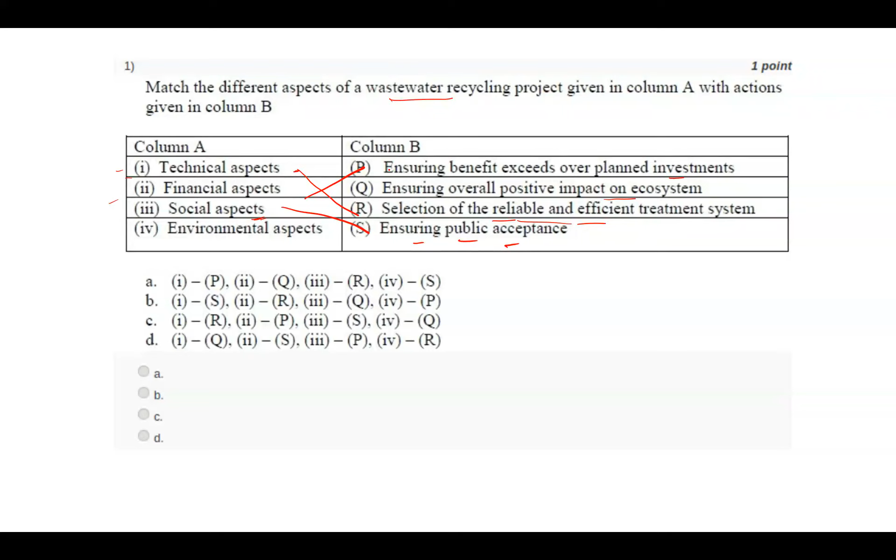What about social aspects? Social aspects means ensuring public acceptance. In our country, if you take water from a well or from a desalination plant, people accept it and don't have any problem drinking it. But when you think about wastewater - treated water from the wastewater industry - many people think it's not to be consumed. So there should be public acceptance if you want to succeed in the wastewater recycling sector.

Environmental aspects means ensuring overall positive impact on the ecosystem. When you treat wastewater, you're not disposing it directly to the land or water, so the ecosystem is preserved - you extract maximum minerals, decrease the amount of chemicals inside, and then dispose it. So there is ecosystem balance that can happen with wastewater recycling. So the correct answer for this is C.

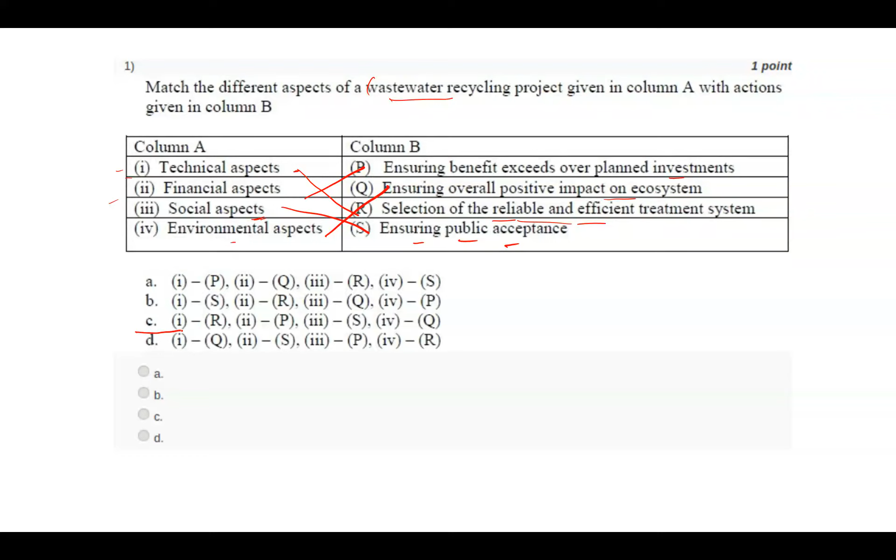Next question: the major hurdle in wastewater recycling is - options are: A) unavailability of suitable technologies, B) political motivations and social acceptability, C) abundance of freshwater resources, D) none of the above. Any answer?

No, it's not option D, it's B. Political motivations and social acceptability, because when we compare other options, you see there are...

If you have good policies in India, it was easy to achieve this wastewater recycling, and also social acceptability. More than 50 percentage of people in India think that this wastewater treated water, the water generated after treatment of waste, is not fit to be consumed. So they have some religious thing, or they just don't accept it. So that is the important thing.

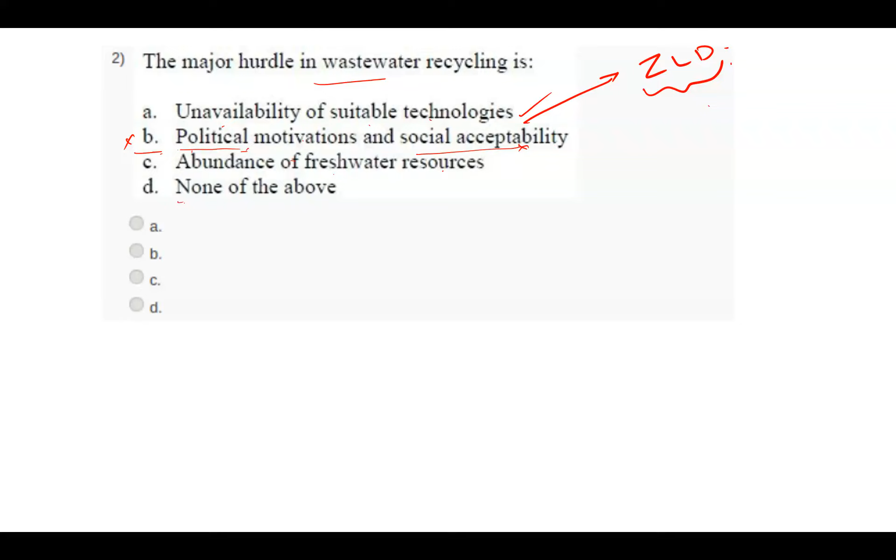Also the political aspect, we should have strong policy, strong laws. We lack these things. We have very good technologies, well established technologies, and also developing technologies to treat wastewater, and the zero liquid discharge is there. Even zero liquid discharge has started in some parts of India. But people are not ready to consume the water from wastewater treated plants.

Next question, the fit for purpose water treatment. This term fit for purpose wastewater treatment is a process that considers the intended use of water, the environment, the economy, to treat the wastewater. The goal is to treat wastewater to the right quality without over or under treating. What do you think over treating means?

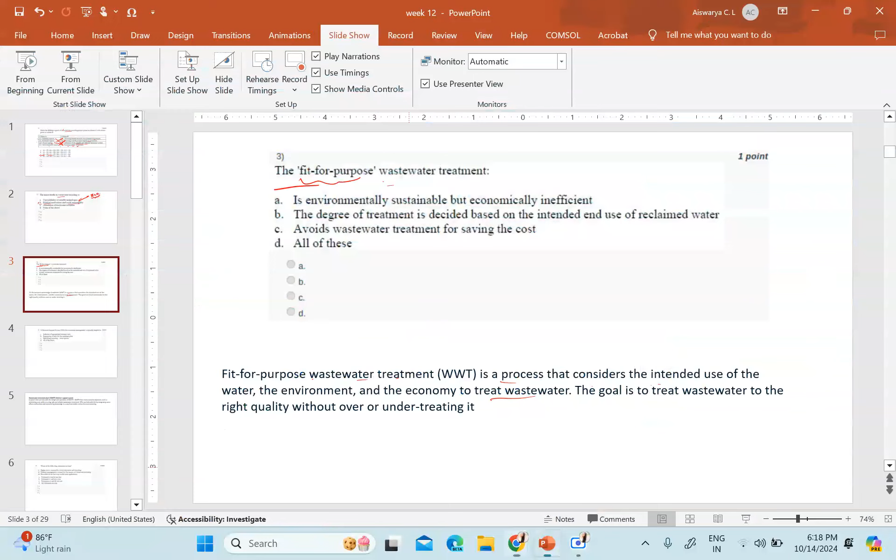Anyone say over treating? What do you mean by over treating water? Over treating means the water is extremely pure, it's deionized water. The conductivity of deionized water is very low, we can approximate it near to zero. That means the elements are not present. Even for human consumption, there should be proper elements in the water so that it benefits our body. So DI water means it's completely pure, there are no other mineral elements present.

This is the DI water. That means if you over treat the water, if you treat it to completely remove all the minerals, all the elements, then it will reach near to DI water. What we need is our water consumable. If this consumable level is here, and if you treat again then it becomes DI, then if you treat less then it is under treated.

So we can't consume the water here. When we reach our treatment technology or treatment system to treat our water to a particular level for consumption, that is consumable. And again if you treat the water again, then it becomes completely highly pure water, where there are a lot of elements not present which are needed for our body. So that is the over treated water.

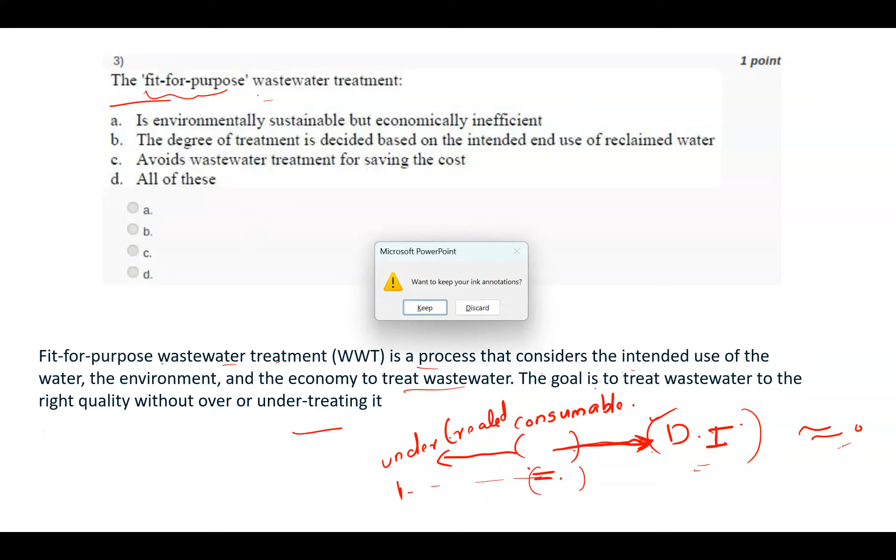Any answer? B. Yes, B is the right answer. So why is this like, you should know the end use of water, then you decide how much treatment you need.

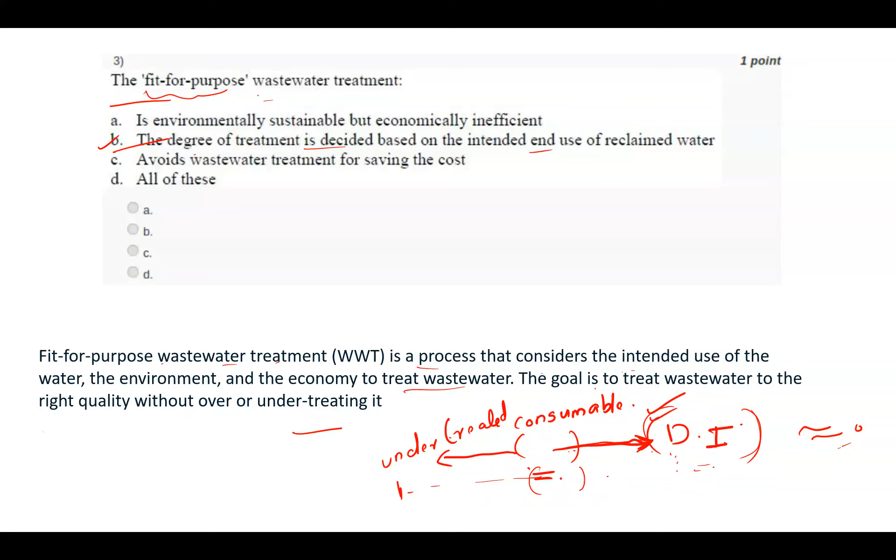So for what is DI water useful? In industries, for fabrication. For example, if you want to fabricate membranes even for dialysis, very sophisticated membranes, in some of the steps you have to use DI water, not RO water. So during the fabrication pathway, there are different applications where you need DI water, so there you need to treat that much. If you want to consume, you don't need to treat that much like DI, then it is fine. Undertreated means if it's a little bit undertreated, then it's not human consumable, but you can use it for agriculture. So you decide the end use where you want to apply, then you decide how much treatment I should give for the wastewater.

Next is fourth question. A decision support system, DSS, for wastewater management is typically helpful in: A, selection of appropriate treatment units; B, sequencing of units for treatment plant; C, identifying recycling or reuse options; D, all of the above. A decision support system for wastewater management, what do you think?

Any option? So the answer is D, all the above. See, decision support system for wastewater management - you should select the appropriate treatment units and the sequencing of units for the treatment plant.

So, how many units do you need? For example, say you need to treat wastewater from dye industries, and then wastewater from oil and gas industry. You will select the technology - you go for a technology and select which one is most suitable for oil and gas, and which technology you can go for the dye industry. That depends on the chemical composition of the wastewater also.

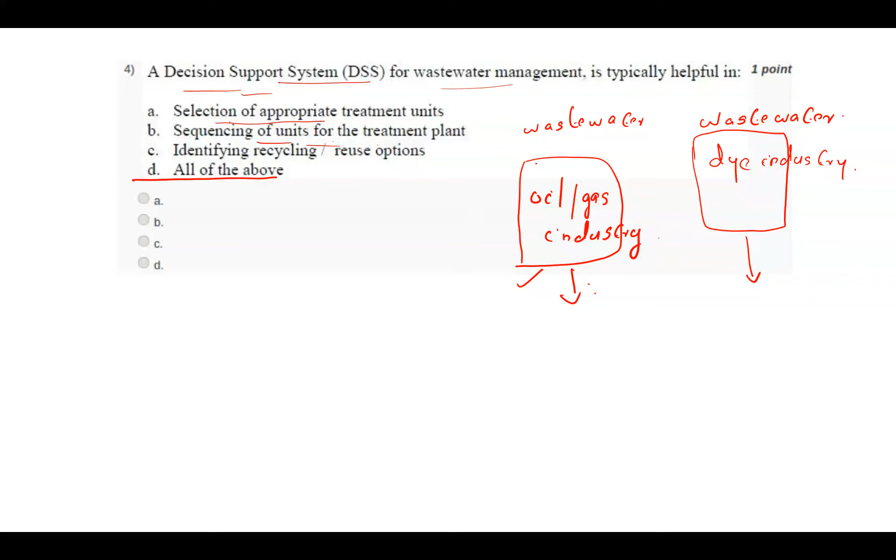Then you have to consider how much you need to treat. If you go for a thermal treatment method, you may have heard of MSF and MED - multi-stage flash distillation, multi-effect distillation. These are thermal based technologies, going chamber by chamber. If we put the wastewater in, some vapor is generated and collected, then the remaining wastewater goes to the second chamber, like that. So you should know how big you want it, or how many different compartments you need for this MED and MSF - this type of chambers are there.

Or if you go for electrodialysis - we have already discussed this. Ion exchange membranes are there, anion exchange membrane, then cation exchange membrane, and this becomes one compartment. Like that you can stack more. So the number of these will depend on the concentration, and also the amount of water you have to treat.

Then identifying recycling or reuse options. Before that, if you don't want to treat, you can still recycle. Also, the water which is treated from any of these technologies - even MSF and MED - the vapor is somewhat pure, and the wastewater you get at the end stage, even the concentrated one, you can use. If it's more concentrated, then it is more rich in minerals or some elements, so that one you can use for resource recovery also.

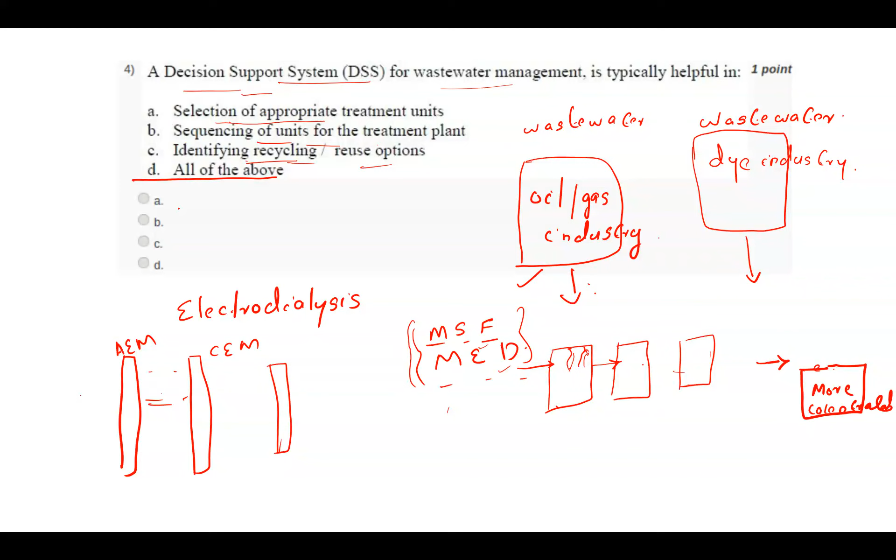So a decision support system for wastewater management will include all these steps. So here you can read - this wastewater treatment plant decision support system helps with the design and operation of wastewater plants, facing many complex objectives such as minimizing cost while ensuring safe and reliable wastewater treatment. It can help by integrating cause-effect relationships and representing knowledge in a way that enables comprehensive reasoning.

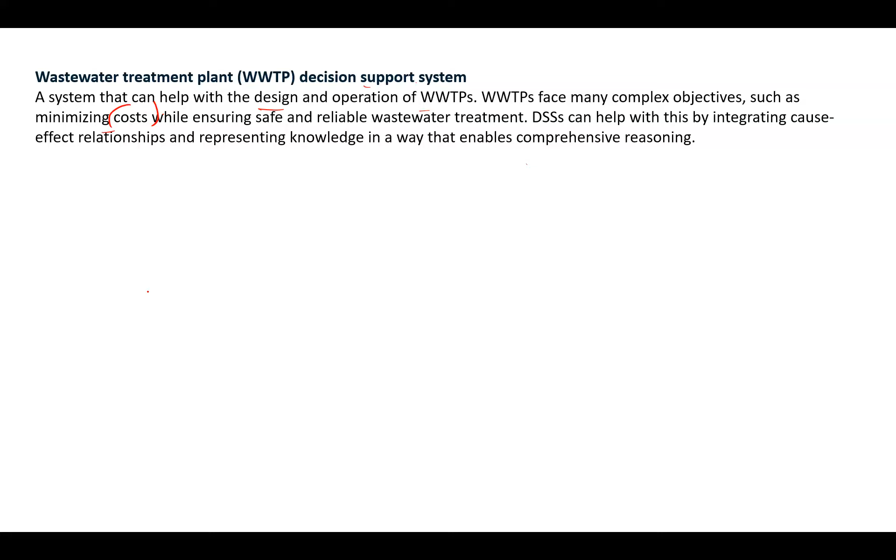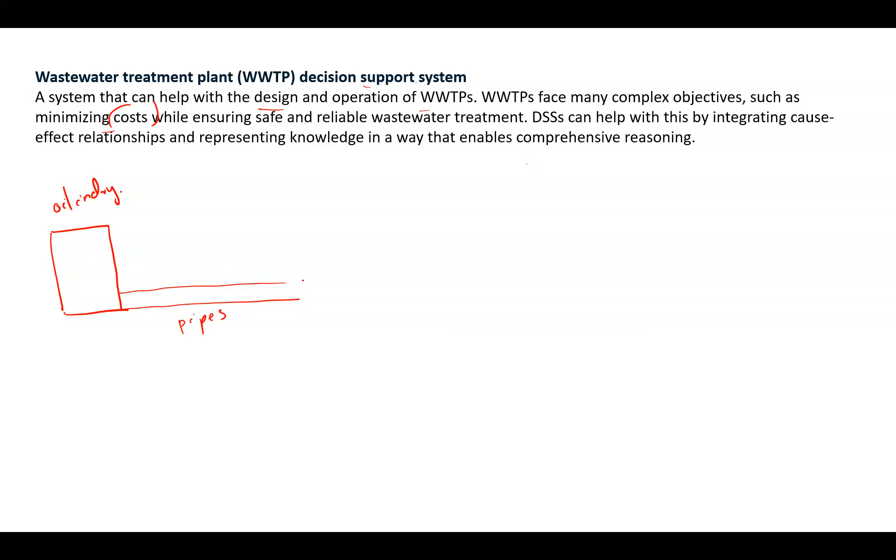So here one more thing is there - cost, how this affects cost, minimizing cost. For example, if you have an oil industry here, and you want to treat it away from your plant, then you need to transport it. For that you use transportation pipes and pipe systems. Then you have a plant - so when you calculate the cost, here it will come, this is the treatment plant.

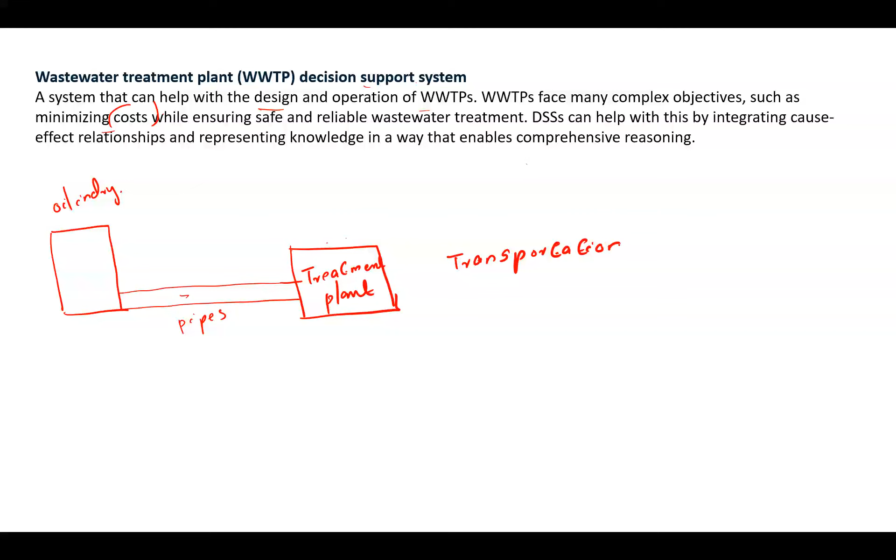When you analyze this cost, you have to give also the transportation cost. Transportation cost is also a big thing in many treatment plants. You may have also heard of brackish water treatment plants - mostly in Rajasthan, which is a landlocked region. So there, transportation cost, when you get a concentrated one, how can you dispose it - there is no sea nearby, so it is much more difficult. So transportation cost is an important thing. Then you should have the planned build, like a whole plant setup. Then also labor cost will be there, and maintenance cost you can add.

Then also you need electricity. I'm not adding electricity cost here, but even in maintenance, or maybe in the plant setup, you can add electricity also. Electricity is an important thing. So you have to understand how much cost is needed for a plant setup, and in what step you can minimize or optimize the cost so that the total cost is less.

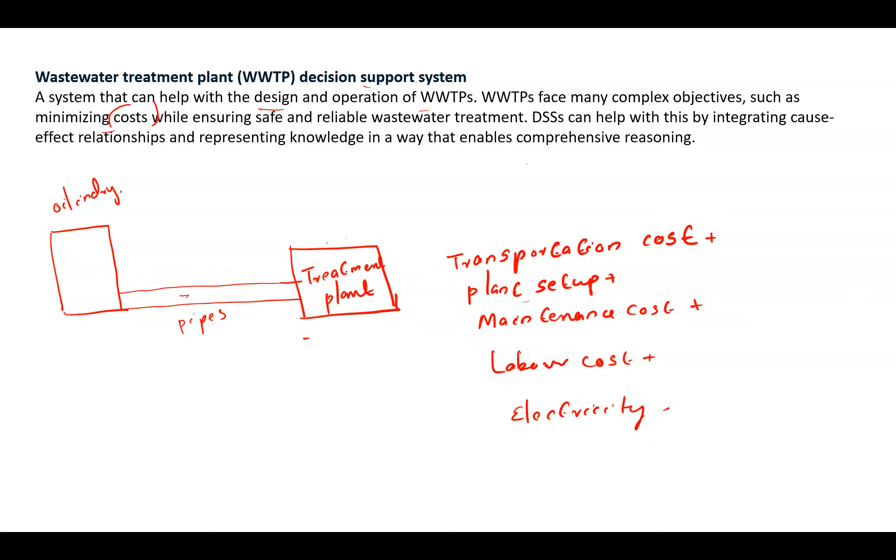You may have heard of one more thing. If you set up a plant in one place, that particular place may have another setup, like it may be full of plants, trees, or other buildings. You have to first remove all these and then build. So clearing the land is also a big thing. Finding a land and clearing the land is also a big cost. All these costs will come when you fully analyze the water treatment plant setup.

Next question: which of the following statements are true? 1. Higher cost is incurred in wastewater reuse and recycling. 2. Nutrient management is crucial for the success of wastewater recycling. 3. Biosolids do not have any useful reuse applications. So which of these statements are true?

Any guess? Any idea?

Answer is A. Statement 1 and 2 are true. Higher cost is incurred in wastewater reuse and recycling. Then nutrient management is crucial for success of wastewater recycling.

Okay, next question. Public acceptance for recycled water can be enhanced by. Four options are given: A. Public awareness campaigns involving media and women. B. Providing subsidies on using recycling water. C. Promoting through demonstrative projects and models. D. All of the above.

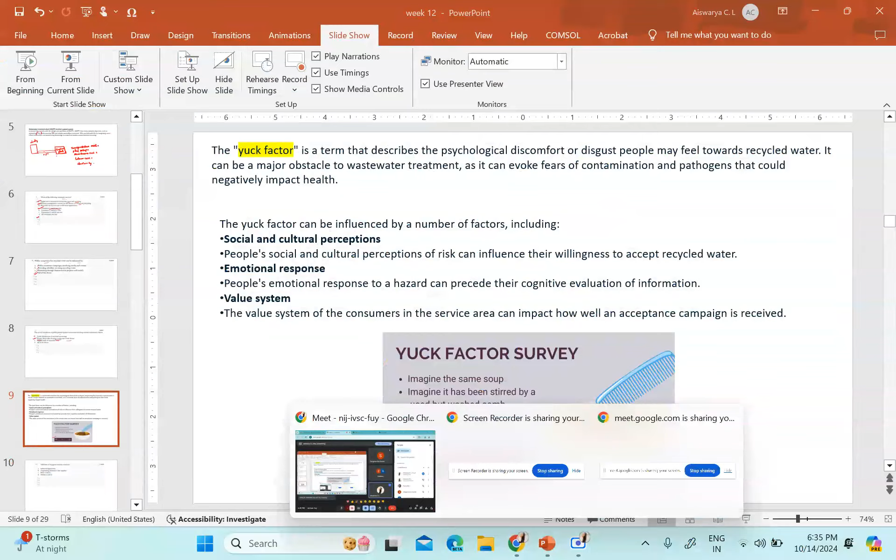Then you can even tell. So you guys, I think how many people are there? I think today 4 people are there. So can you just message here in this message box, from this yuck factor survey. From 1 to 10, which number do you choose?

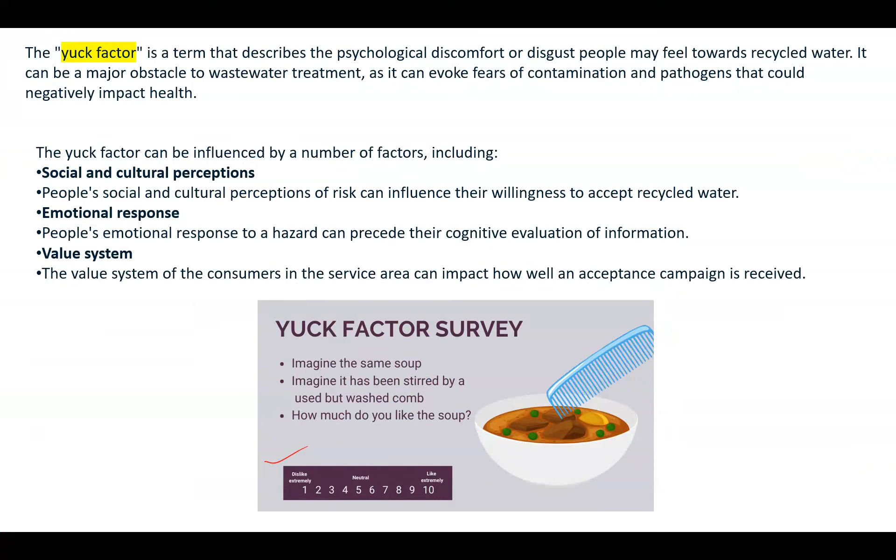Imagine this is a nicely prepared soup, and it is stirred by a washed comb. It is a cleaned comb, washed comb, but still you're stirring with the comb. What do you think? Do you like the soup? According to your likes, can you just message in this box which number you choose? You can just put a number.

Okay, Sanjay says 1.

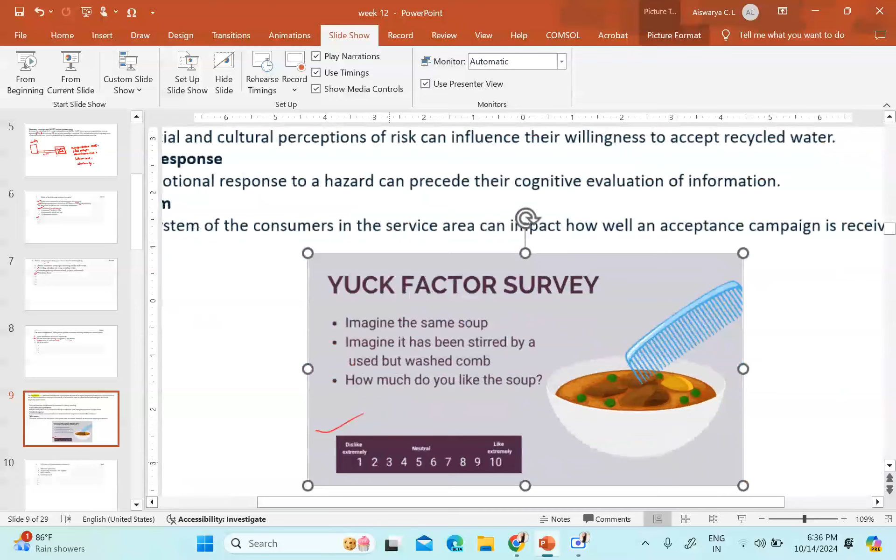Yes, the lowest one is 1, you can see here. Lowest is 1 means you extremely dislike. Then when you reach 5, it's neutral. Then 10 means you are fine, you're okay.

Sangamitra says 1, then Pooja says 9. Okay. Yeah, many people, even when we see this now, we don't like it.

Okay, so any comments you want to say? Sangamitra, you want to add something? Okay, then Pooja, you can add something.

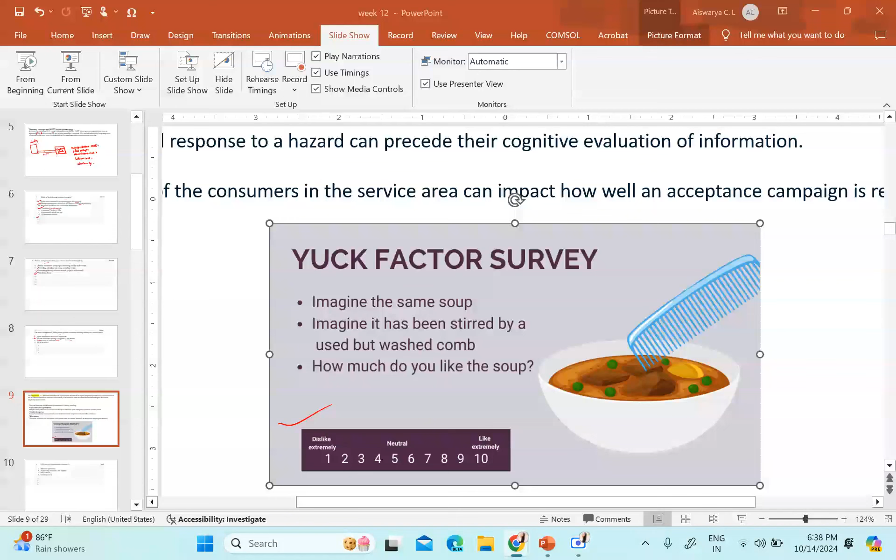Okay, so you guys also know how recycling of water is happening in space. Even the urine is recycled and taken for drinking, because there is no other way of getting water. So I'll just type space recycling.

You can see if you search online, you'll get a lot of documentaries on this, how they are not wasting even a single amount of water, because there is no other way of drinking. But even when we get enough water to drink from nearby, we don't feel good to drink recycled water, just like if your food is in touch with something unpleasant, we don't feel like eating it.

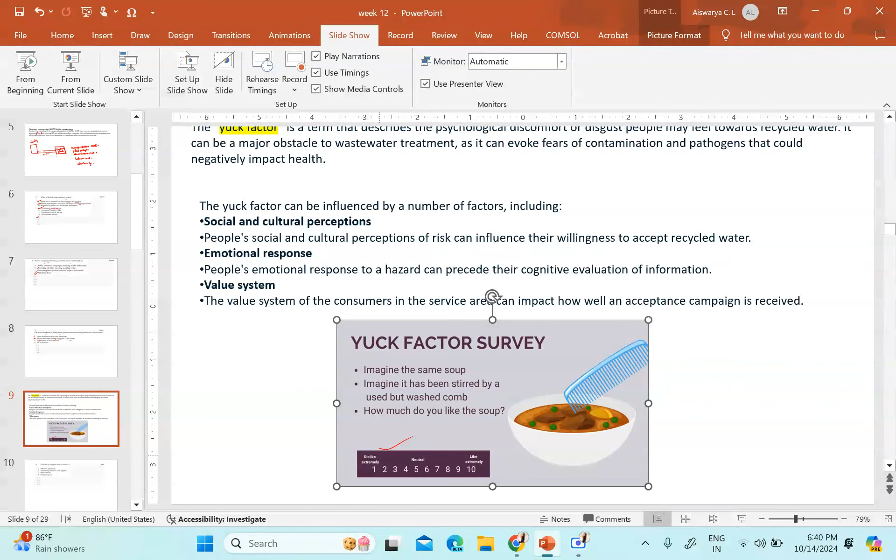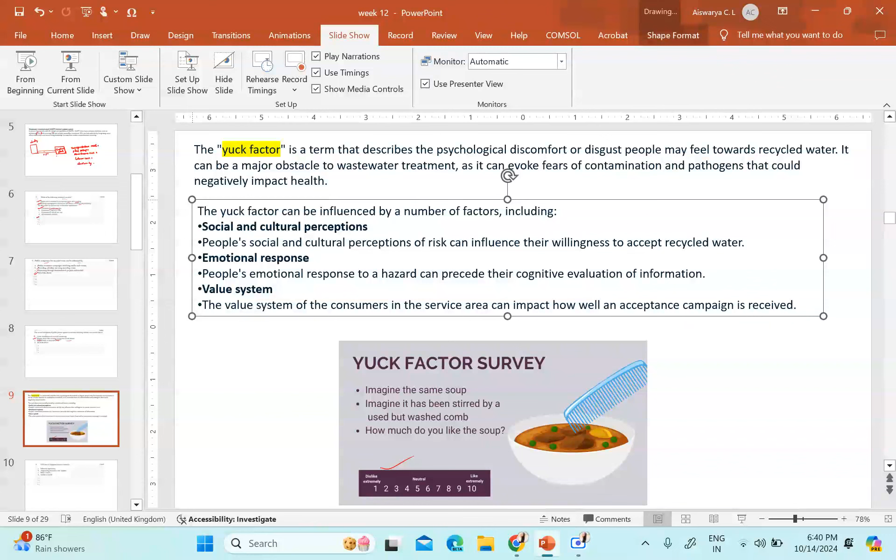That is true, but in some situations, because of climate change, there are areas with drought and areas with heavy rain. So at a particular time we also need to adapt, and we will start drinking even treated wastewater, because we won't have any other source at that time. You can google it or go through documentaries to know more.

Now next question. NEWater of Singapore recycles water for what purpose? Four options are given: industry, augmenting domestic water supplies, both A and B, or neither A nor B. What do you think?

NEWater of Singapore. Answer is C, both A and B. Industrial application, also augmenting domestic water supply, depending on the end composition of the NEWater, it can go either to industry or for domestic water supplies.

This NEWater is a very famous name nowadays, because when you go to water conferences, there are talks on NEWater most of the time. This NEWater is a brand name given to highly treated, reclaimed wastewater produced by Singapore's Public Utilities Board. You may have heard of this.

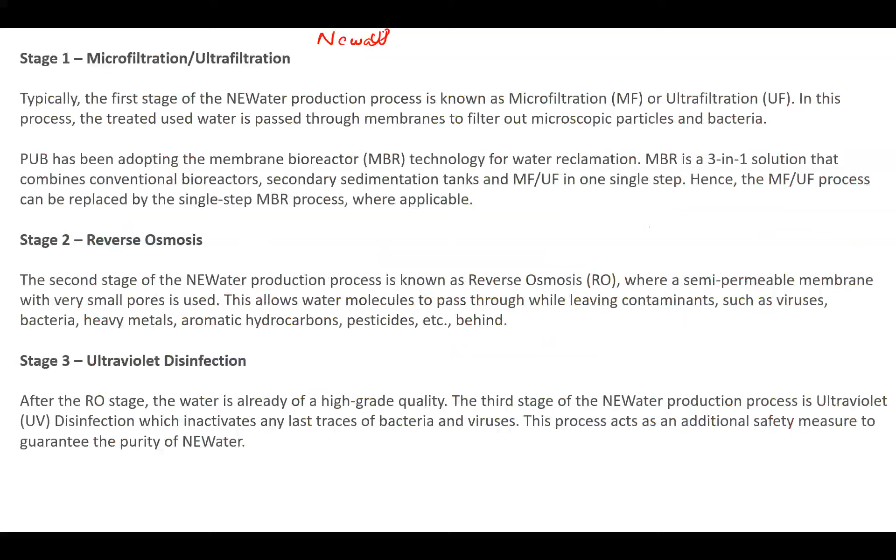Now how are they producing this NEWater, meaning how are they extracting this highly treated water? The first step in NEWater production is microfiltration or ultrafiltration, in which the treated wastewater is passed through a membrane to filter out microscopic particles and bacteria. That is the first process.

Then the second process is reverse osmosis, the second stage of NEWater production. Here a semi-permeable membrane with very small pores is used, which allows water molecules to pass through while leaving behind contaminants such as viruses, bacteria, heavy metals, aromatic hydrocarbons, pesticides, etc.

Then the third step is ultraviolet disinfection. After the RO stage, the water is already good quality. In the last stage, ultraviolet disinfection inactivates the last traces of bacteria and viruses, producing highly pure water. So why do we put reverse osmosis after microfiltration or ultrafiltration?

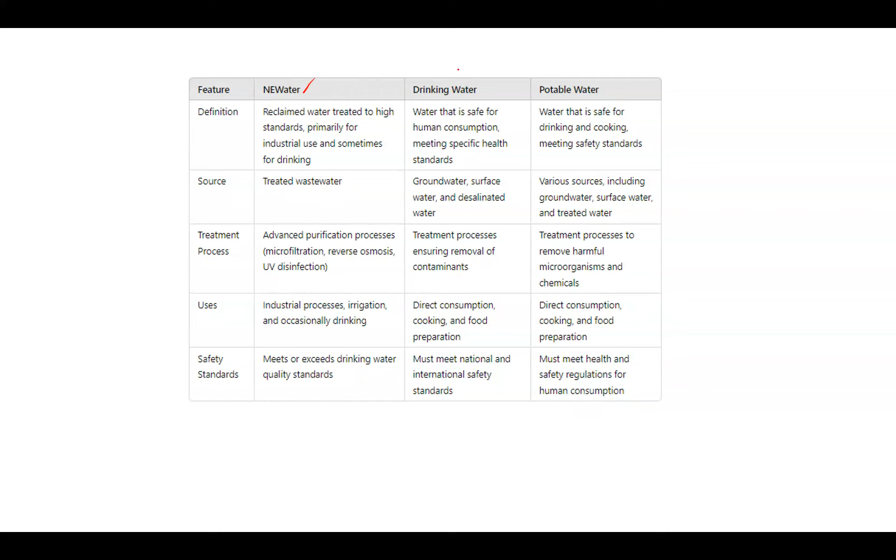Next question: Israel recycles most of its sewage for what? Four options are given: A, groundwater recharge; B, augmenting domestic water supplies; C, agricultural reuse; and D, industrial cooling towers. Israel recycles most of its sewage for...

Any idea? The answer is C, agricultural reuse.

Actually, Israel is a very small country, and they are developing very high tech technologies in water treatment because their area is very dry, semi or fully dried area. That means they need some technologies to produce water. They have a large number of desalination plants also, and for agriculture usage, they are recycling sewage waste.

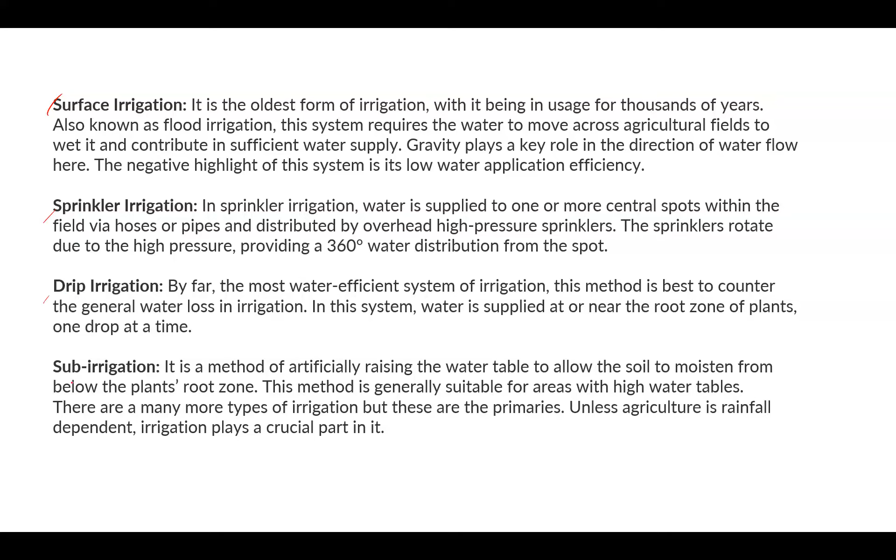So they more efficiently cultivate these types of drip agriculture lands, using this treated wastewater that you can see. I've given the irrigation types they have adapted: surface irrigation, sprinkler irrigation, drip irrigation, and sub irrigation. So you can just read that.

Next one: usually the public acceptance of recycled treated sewage is highest for, A, potable uses; B, bathing and washing clothes; C, fish farming and food crop irrigation; D, watering lawns and washing cars.

Most public acceptance, any idea? Yes, D, watering lawns and car washing. For this, most people don't have much objection. Potable uses, people were not that much okay with that. And also bathing and washing clothes, and fish farming and food crop irrigation, because many people think that when we apply waste treated water near the food crop, then when we consume the food from the crop, that will affect us.

Okay, next question. Advanced treatment techniques used to treat wastewater for direct or indirect potable uses in NEWater Singapore, and Orange County Water District California include: A, membrane bioreactors and advanced oxidation processes; B, activated carbon adsorption and chlorination; C, microfiltration, reverse osmosis, and UV disinfection; D, membrane bioreactors, ozonation, and UV disinfection.

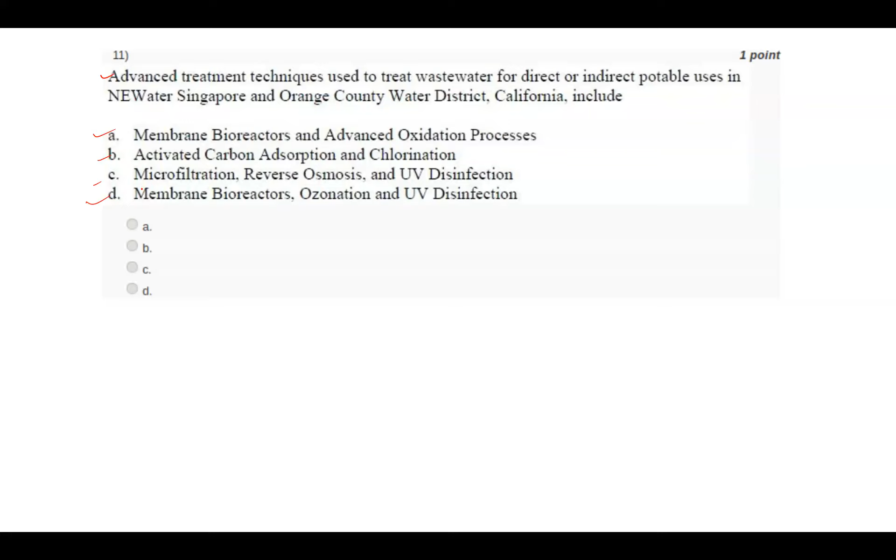Okay, the answer is C only. C is the answer: microfiltration, reverse osmosis, and UV disinfection.

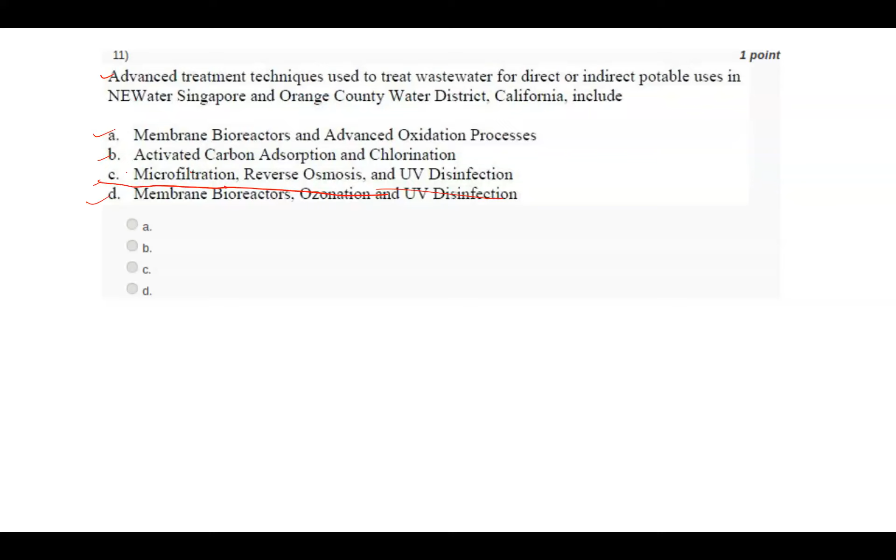Next question. Zero liquid discharge policy as a mandate for gross polluting industries asks for: A, ensuring treatment and complete recycling of industrial effluents; B, only land disposal of wastewater and no discharge to surface water bodies; C, shift to production of products which do not require water; D, all of the above.

So ZLD for the polluting industries, it's mandatory. Why is it? Which option is more suitable? Yes, right, it's A: ensuring treatment and complete recycling of industrial effluents.

Zero liquid discharge (ZLD) is mandated for gross polluting industries to ensure treatment and complete recycling of industrial effluents. Option B, land disposal of wastewater with no discharge to surface water bodies, is wrong because land disposal still pollutes groundwater, and during rainy season that water can reach nearby water bodies too. The option about shifting to production of products that don't require water is also not right. So the correct answer is ensuring treatment and complete recycling of industrial effluents, needed for polluting industries.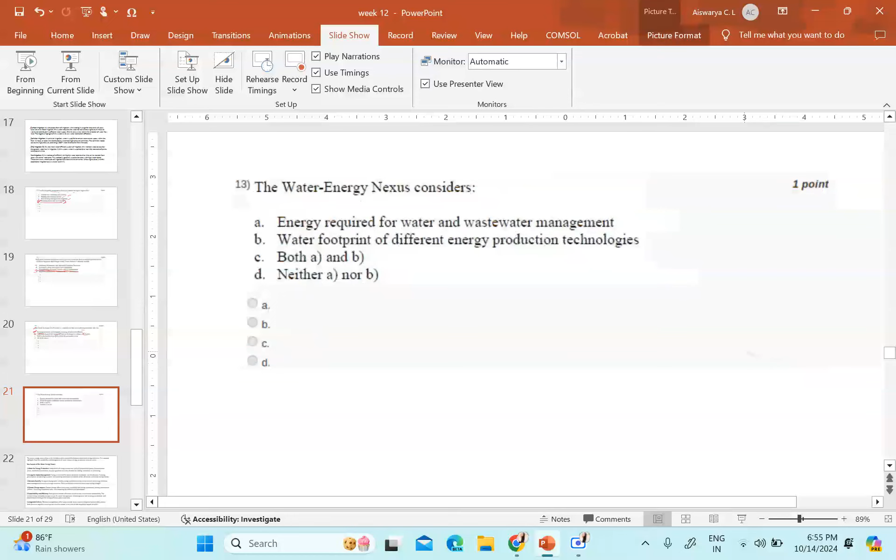Next question: the water energy nexus considers which of these options? A, energy required for water and wastewater management. B, water footprint of different energy production technologies. C, both A and B. D, neither A nor B.

What do you think? Any answer?

The answer is C. Energy required for water and wastewater management is the water energy nexus, along with water footprint of different energy production technology - how much water is given or how much water it produces. The water energy nexus refers to an interdependent relationship between water and energy resources. This concept highlights how availability and management of water impact energy production and vice versa. Key aspects include water for energy production, energy for water management, resource scarcity, climate change impact, sustainability and efficiency, and integrated policies. You can read about it and understand how energy also comes into water treatment.

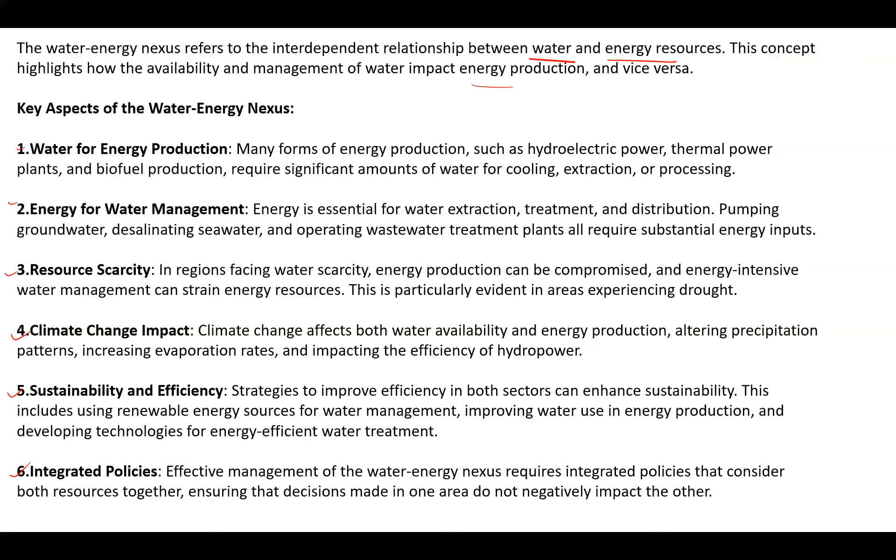Next question: which Indian city has planned to use recycling sewage for indirect potable reuse as a pilot model of Singapore's New Water? Options: Bangalore, Kolkata, Jaipur, Visakhapatnam. What do you think? Any guess?

The answer is A, Bangalore.

Next question: which is the correct statement about public acceptance of recycled wastewater? A, older population are more accepting of reclaimed water use. B, people with higher levels of education have a higher level of acceptance of recycled water. C, religious people are more willing to use recycled water than non-religious people. D, all the above statements are true.

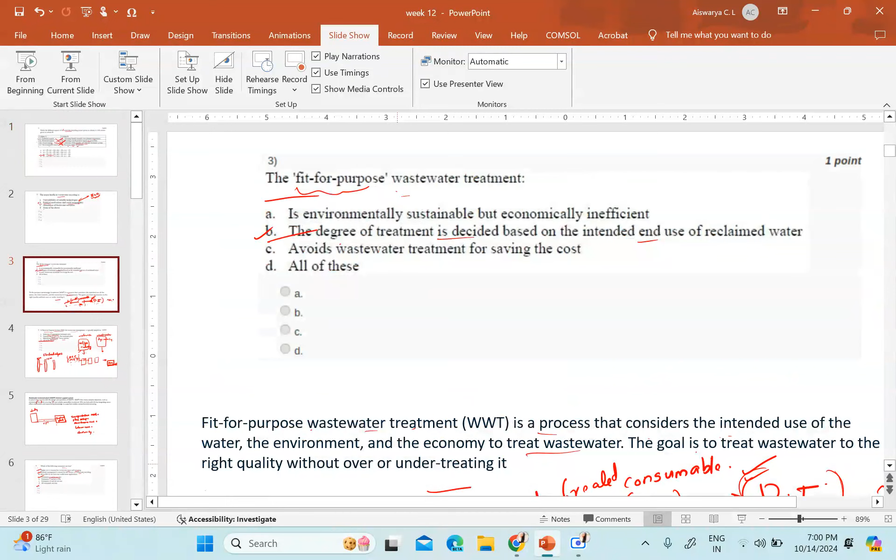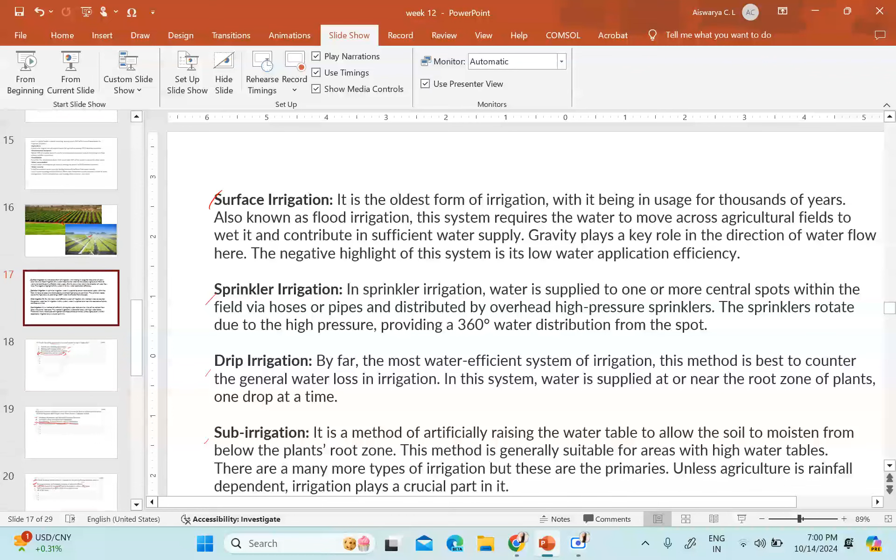Okay. So any comments on the questions till this point? Sorry, sorry. Fourteen. This one. This one. Fourteen is 1-4. 1-4. This one. Right?

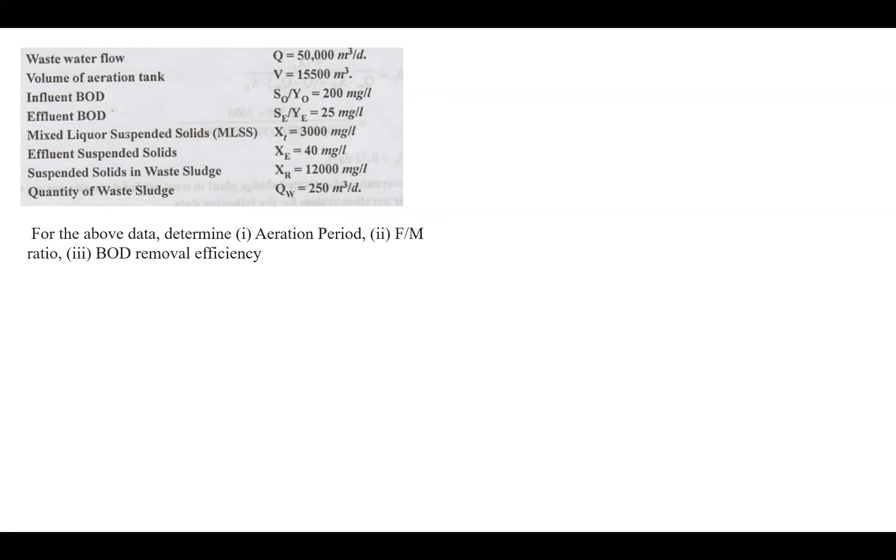So here it's a simple problem where the data of a system is given. We have to find the aeration period, food by microorganism ratio, and BOD removal efficiency. So we have to find three things. First one is aeration period. You can note it down.

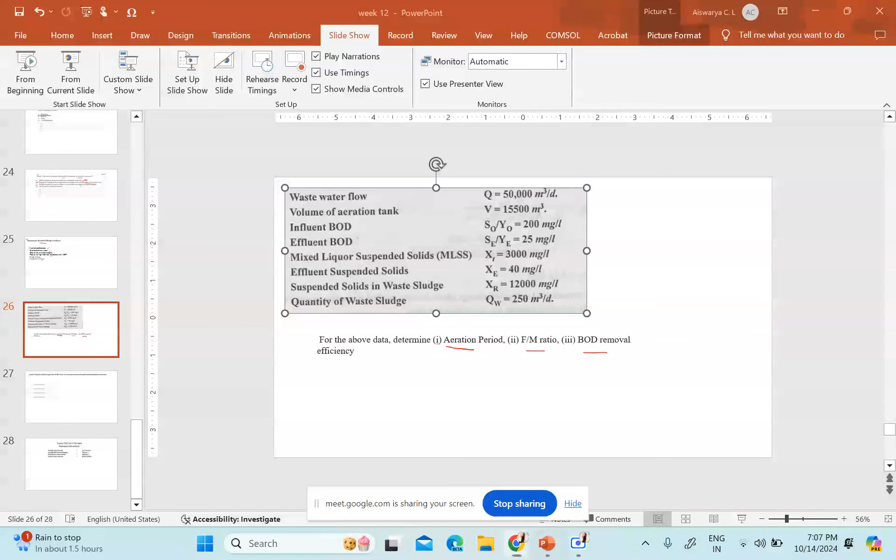So here in the system, see anything? Okay, just 1 minute. Now, now it's okay. So this one you can note it down. This one.

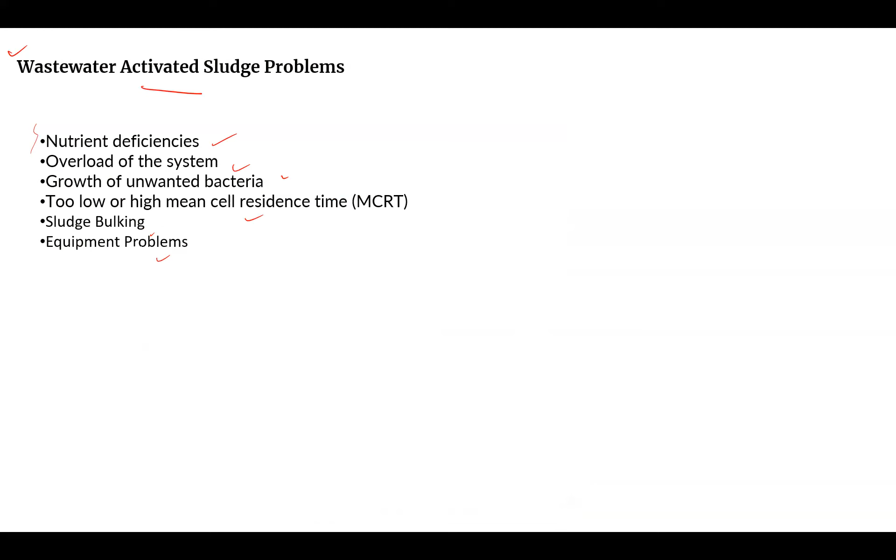So here the system is given, the important parameters are given, and we have to find the aeration period, food by microorganism ratio, and BOD removal efficiency. First, wastewater flow Q is equal to 50,000 meter cube per day. Then volume of the aeration tank is given, influent BOD is given, effluent BOD also given, mixed liquor suspended solids 3000 milligram per liter, effluent suspended solids 40 milligram per liter, suspended solids in waste sludge 12,000 milligram per liter, and quantity of waste sludge 250 meter cube per day.

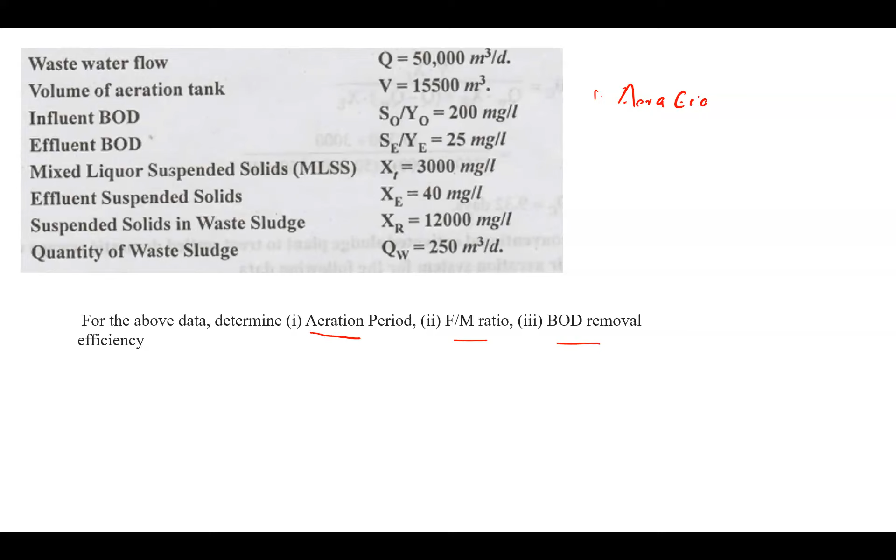So now we have to first find out aeration period. Any idea how we find this? How do you find the aeration hours?

V by Q, yes right. So you can find out and tell the answer. V is 1000, 15,500 divided by 50,000.

So here this is meter cube, and this is meter cube per day. So you get it in days, you can convert to hours also. So how much are you getting, day per day?

I will calculate just... Okay, you get 0.31 day, right? Is it right? For this answer, 0.31 day.

Yes. So then how do you convert into hours? 0.31 into 24... okay, 7.44 hours. That is the answer for aeration period.

And now second one is F by M ratio, food to microbe ratio. How do you calculate this one? Any idea? From this given data, can you tell the formula?

Let's say you just take this one as Y naught, and this as Ye. Just take it like this. So here the formula is Q into Y naught, divided by V into Xt. That means Q is the wastewater flow, Y naught is influent BOD, V is the volume of the aeration tank, and Xt is the MLSS. Through this you can find the answer.

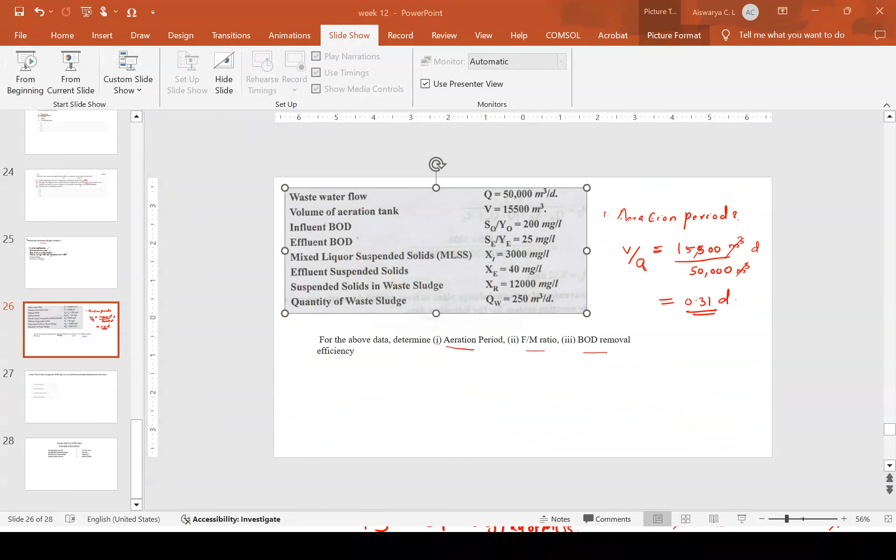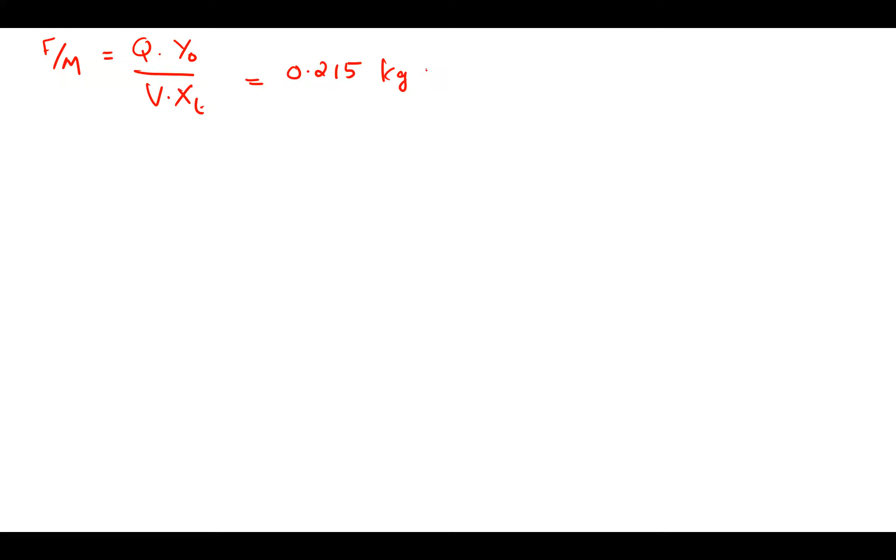So here this answer, what you got from F by M ratio through Q into Y naught divided by V into Xt, that is actually 0.215. This is kg BOD per day, per kg of, because we got per day when we cancel this all, we got per day, but here you see kg and here denominator also kg only. So this unit conversion is there, kg of MLSS.

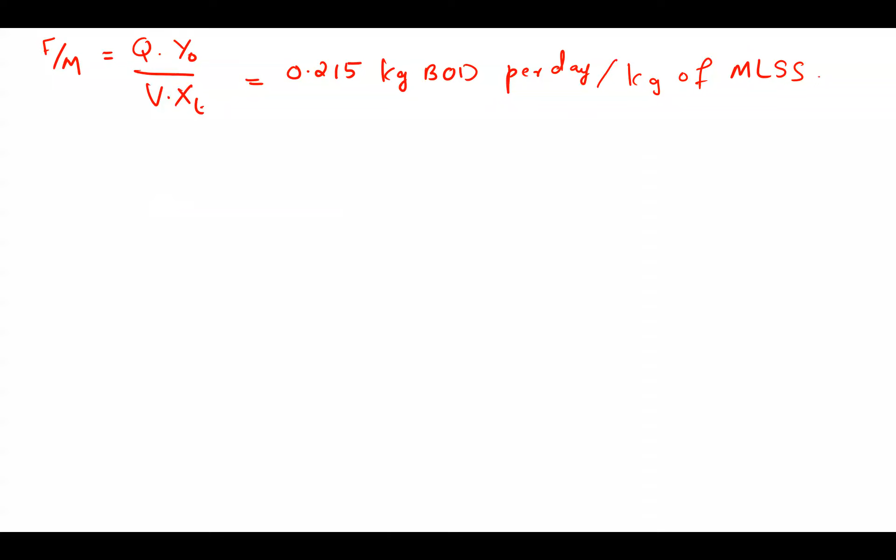Now, in the question, MLSS 3000 is given, that we considered, and when we analyze... okay, this is like per kg of MLSS that we found in F by M.

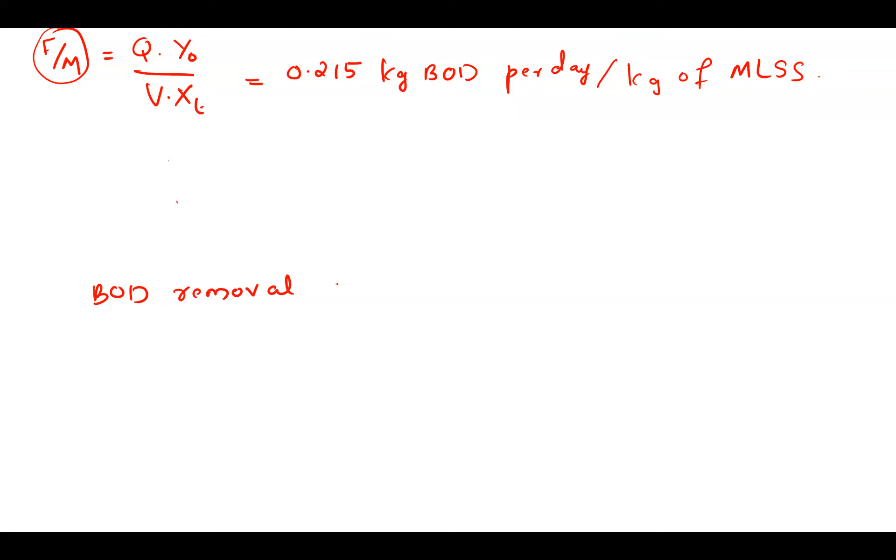So now, just leave some space for this question, and next we will find the last question. Then we come back. Last question is, what is the BOD removal efficiency? How do you calculate this?

BOD removal efficiency. How do you calculate the BOD removal efficiency here? Yes, influent BOD, then you subtract the effluent BOD, then you divide with influent BOD. That is the percentage efficiency of BOD removal, right?

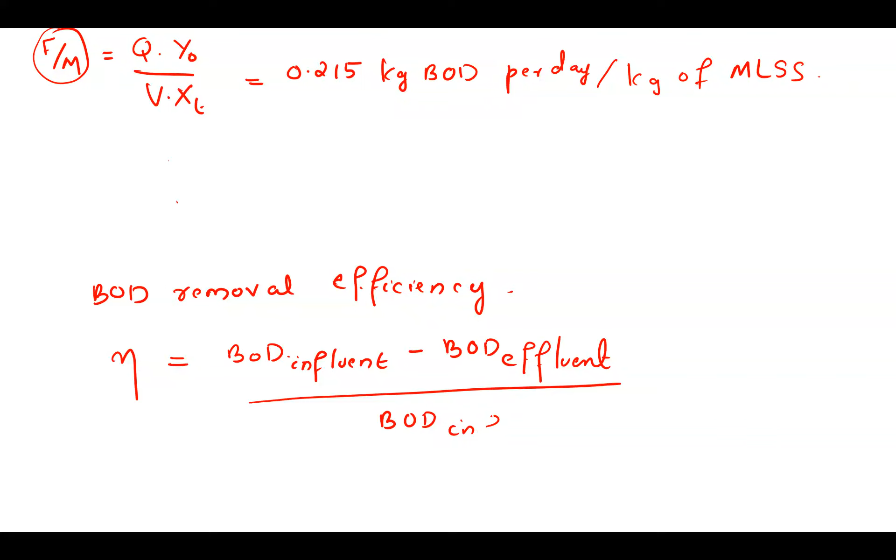See, BOD influent minus BOD effluent, divided by BOD influent, right? Got it? Any confusion in this? 200.

So in that, what you're saying? Yes. Okay, sludge waste - no, here in the booklet they haven't considered it. So that's why I just consider it in a simple way, like influent minus effluent divided by BOD influent, this way.

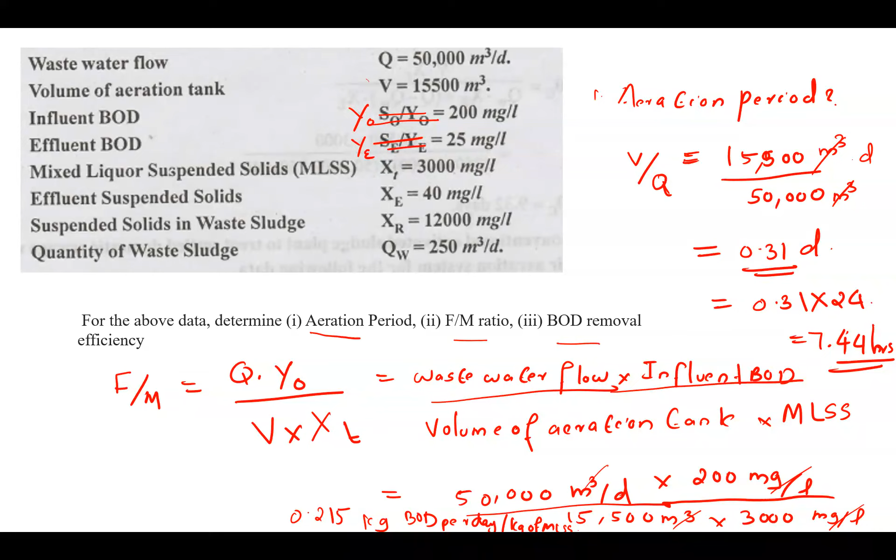So this is like, okay. I think this question, in the booklet, is given this way. So it's just normal - take Q as constant, so the numerator and denominator get cancelled. So we don't need to consider Q here, just go for the BOD influent and effluent.

Yes, next week, Monday. I can't - your voice is actually cutting out. Can you just... okay, okay, sorry.

Okay, you want the influent flow rate and the effluent flow rate given, then you have to find out the removal efficiency. Okay, I'll note it down. Influent flow rate, so that Q on both cancel out, and you should have the two Qs like that, right?

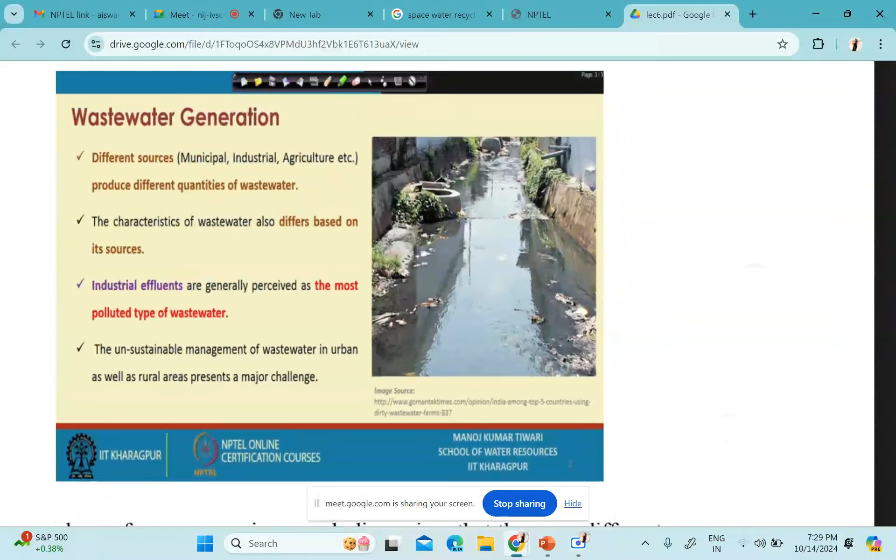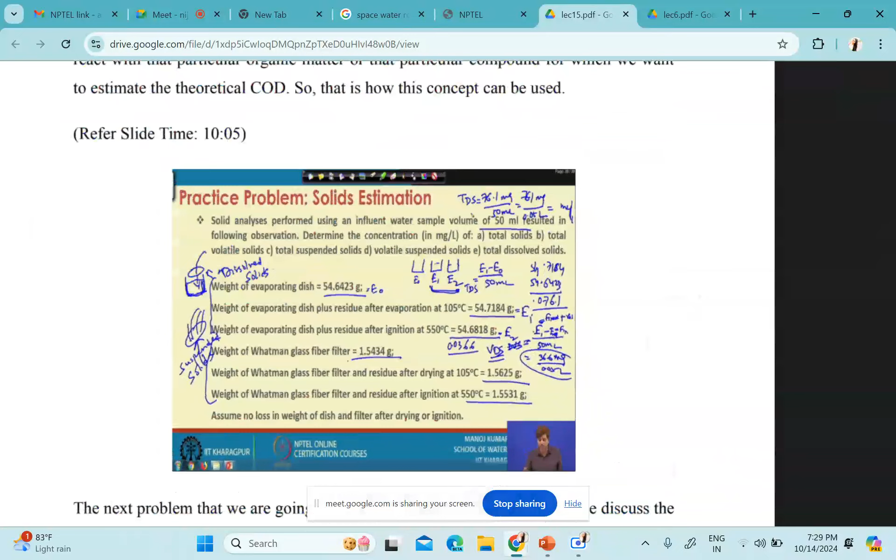So see here, I will just show. So you can see all the videos from the classes, but you can't repeatedly find every part easily. So I feel it's easier if you download this also, it's a kind of note. These are the slides that the professor covers, so you can look into these slides because it's a script of the teaching material, even the videos. You can use this. I feel this is more useful - you can see the video, but sometimes you want to just see the notes, and then you can see these slides. For all your lecture slides, this is available.

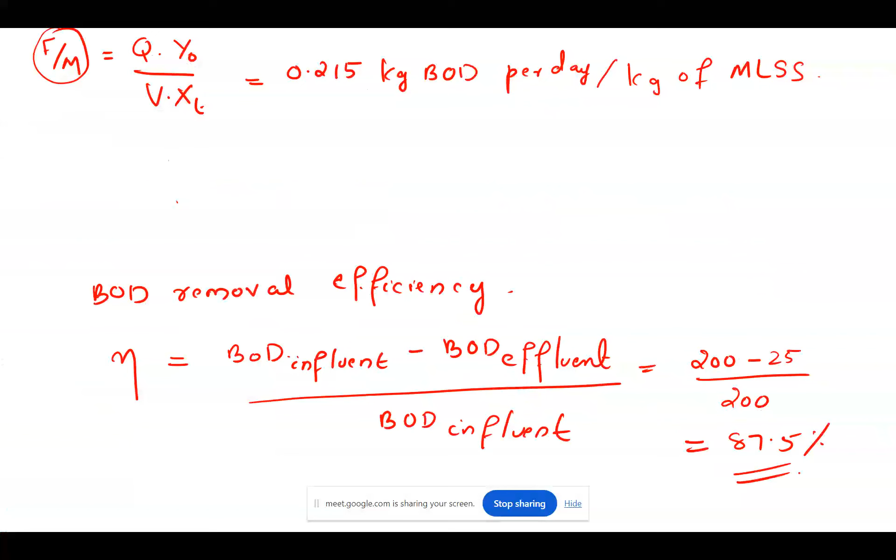Okay, you can take this also. Okay. Yes, yes. Okay. That I actually...

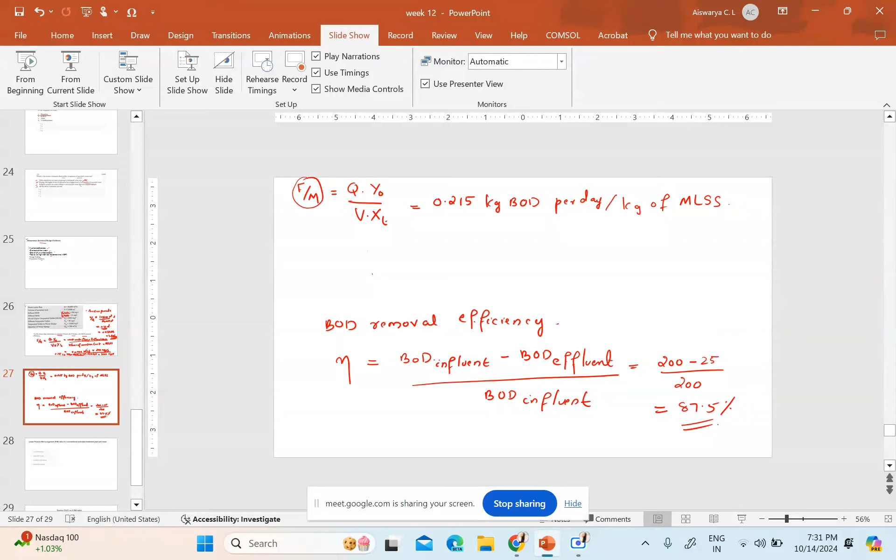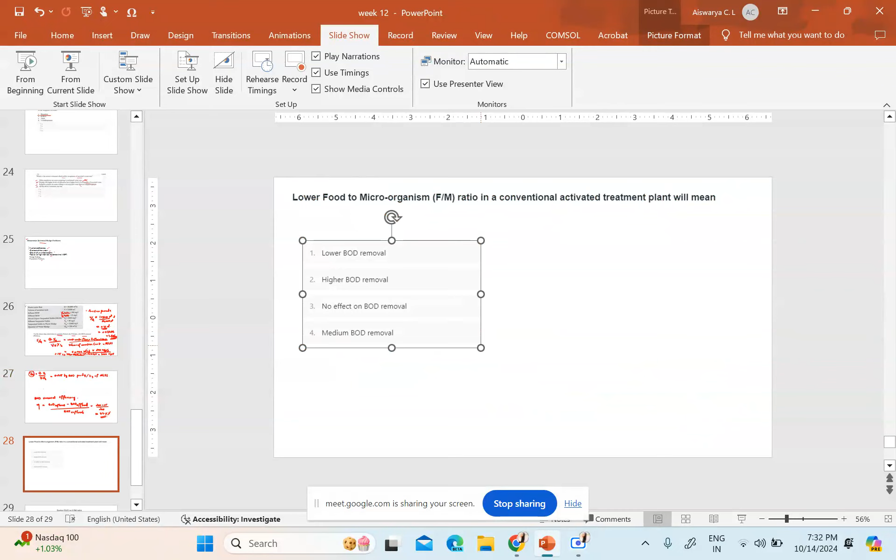Okay, thank you. So actually, I don't have any idea on this also, because I am not correcting assignments and all, so I think you guys can discuss on this. Okay, then the idea that I have given - you can see the videos and also download and keep the transcripts and prepare for your exam. That will be better. Yes, transcripts - I feel like in a video you don't know when that part will come, but in transcript you easily get it, and for your exam preparation you can use it.

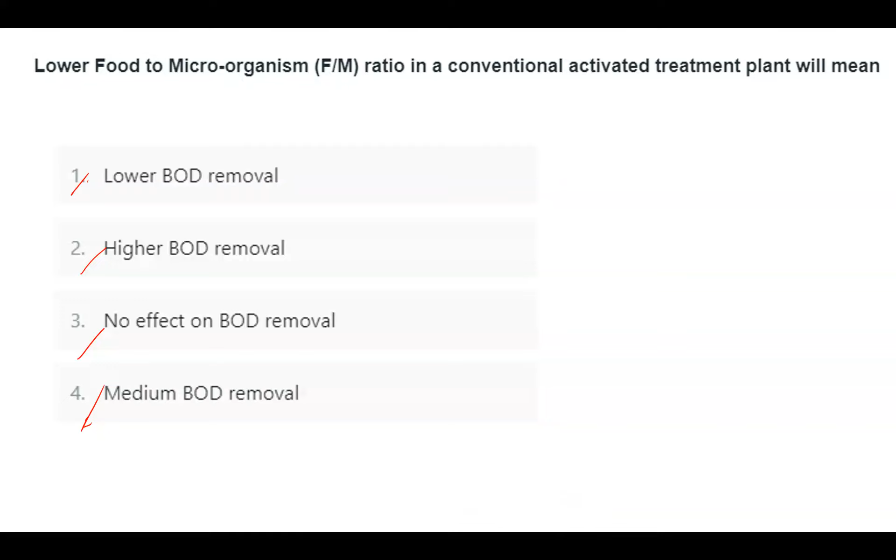Okay, then next question: lower food to microorganism ratio in a conventional activated sludge treatment plant will mean - the options given are lower BOD removal, higher BOD removal, no effect on BOD removal, or medium BOD removal. What do you think? Lower F by M ratio is lower, that means... yes, right. Why is it so?

Food is... yes, then there are a lot of microbes. Then it will remove these. You know, in the food what we are giving, the BOD will degrade or it will convert. Then this is another problem.

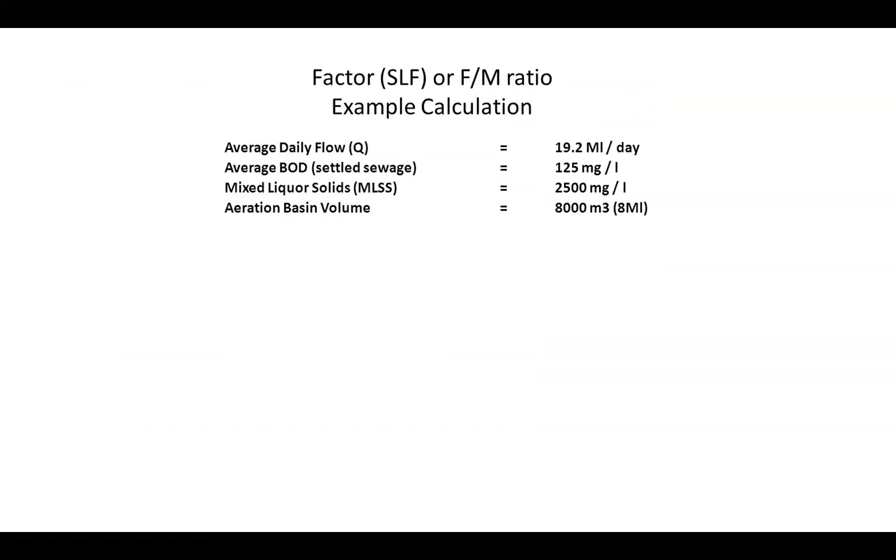We can just solve it, this one, the F by M ratio. So here also daily flow is given, average BOD of settled sewage is given, mixed liquor solids MLSS is given, aeration basin volume is given. You have to calculate the F by M ratio. How do you calculate?

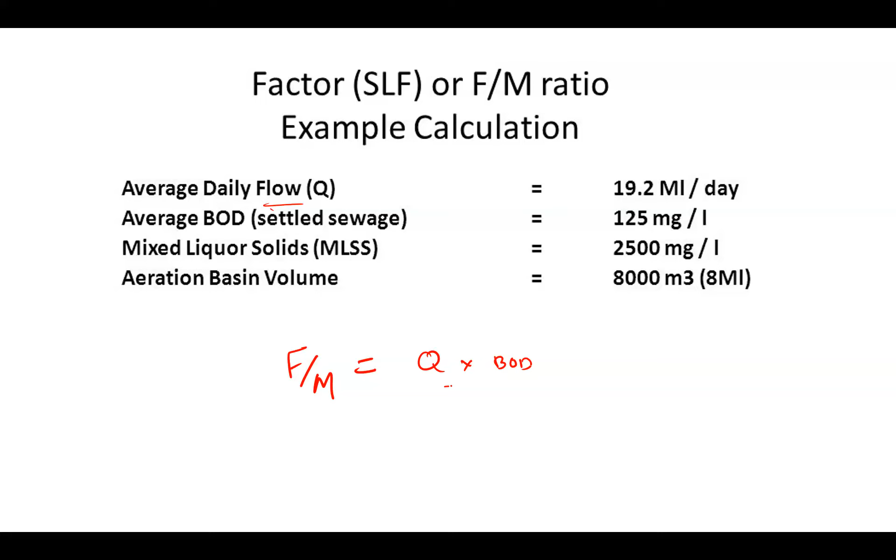If only these parameters are given, then how do you calculate with this data? BOD is given, yes. Then MLSS into V. So here Q is given, and then BOD, we have MLSS, V. So from this you can calculate the F by M ratio.

19.2 million liter per day into BOD 125 milligram per liter, divided by 2500 milligram per liter into volume 8,000. It is like in meter cube, so in mill you can take 8, then megaliter. So then what will be the final?

0.12. Okay, let me also calculate. 0.2 into... yes, right, 0.12. 0.12 you can write as kg BOD divided by kg MLSS per day. Got it? Sangamitra, you also?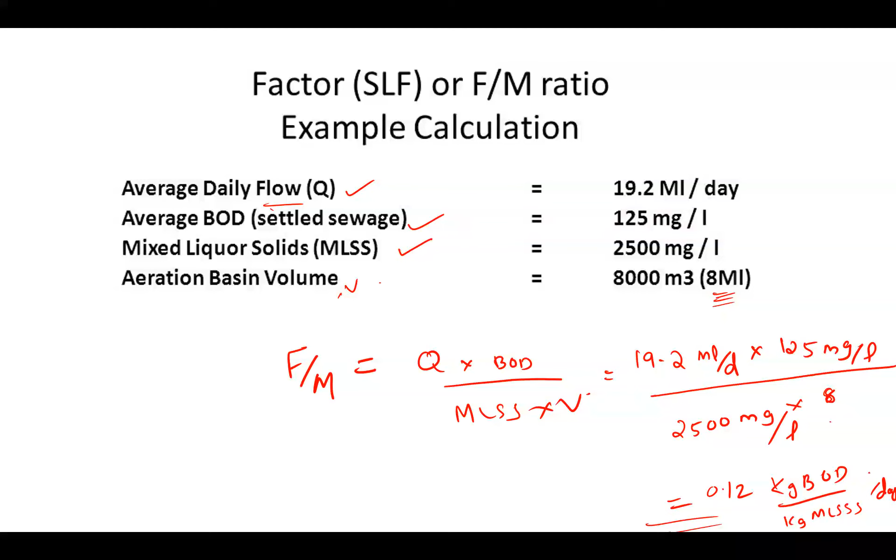Okay, so next class I will cover, I will write also what are the things to cover: problems in activated sludge with different influent and effluent rates, right? Activated sludge process, and then I have to cover with Q influent and effluent. So any other?

So you people also, okay, which one? Different different treatment processes, micro... I mean this MBR, like that, MBBR, that all. Okay. Methods comparison.

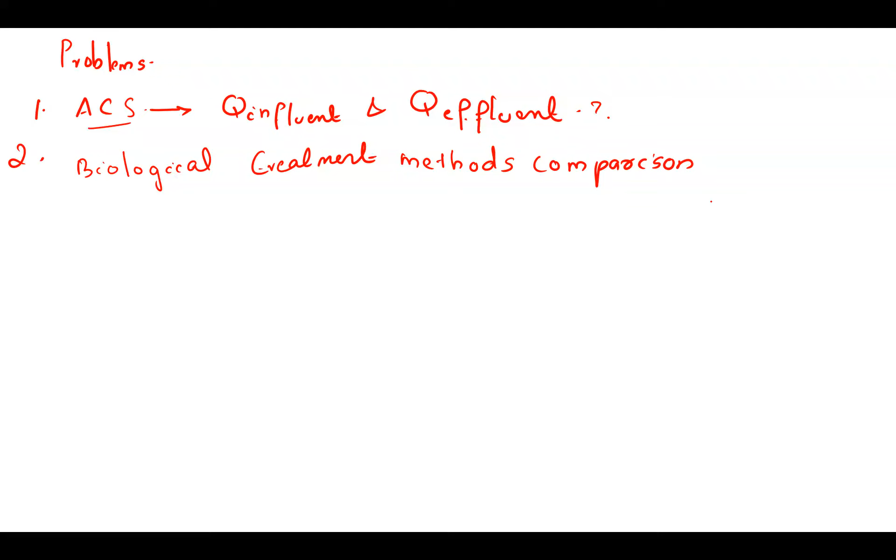No, no, I haven't discussed. If you want, I will discuss in the next class. Phenol removal, okay, phenol removal, like in different ways of treatment, right? Okay, coke, okay, okay, I will discuss. These are... I think nothing else. Then I think the last few classes only this theory. I think that is fine.

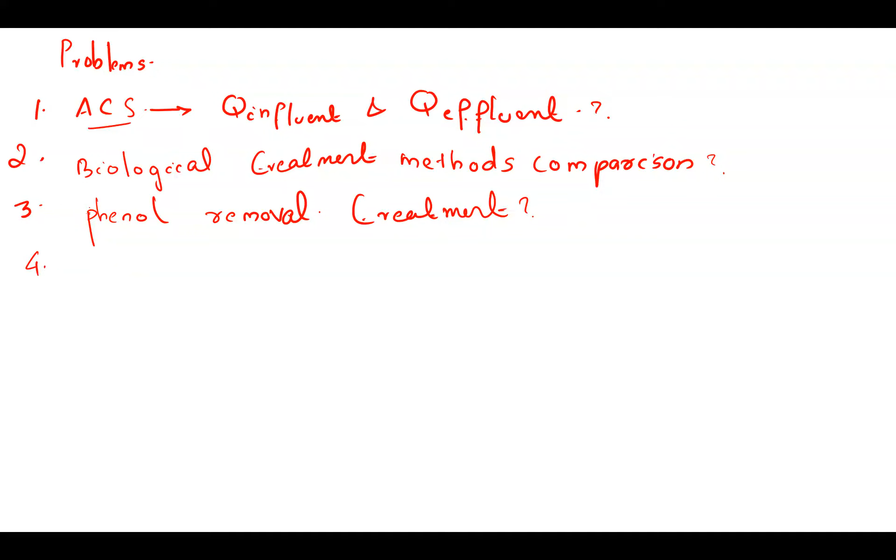I guess simple only. I guess first, if I think weeks 1 to 10 are a little bit... I think more problems are there in that. Okay. Then briefly. Okay. Weeks 1 to 10. Okay. Then enough, right? Anything else is there?

Okay, okay, okay, then I will just start today. I think I will just start with a few things. What I can discuss is a few basic things on water treatment. I'll just take 10 minutes, then we stop today's class. First of all, it's a basic thing, like for your understanding.

I'm telling you, when you understand carbon footprint, I think it will be useful. This concept will be useful in your research time, and also you may have heard of life cycle assessment.

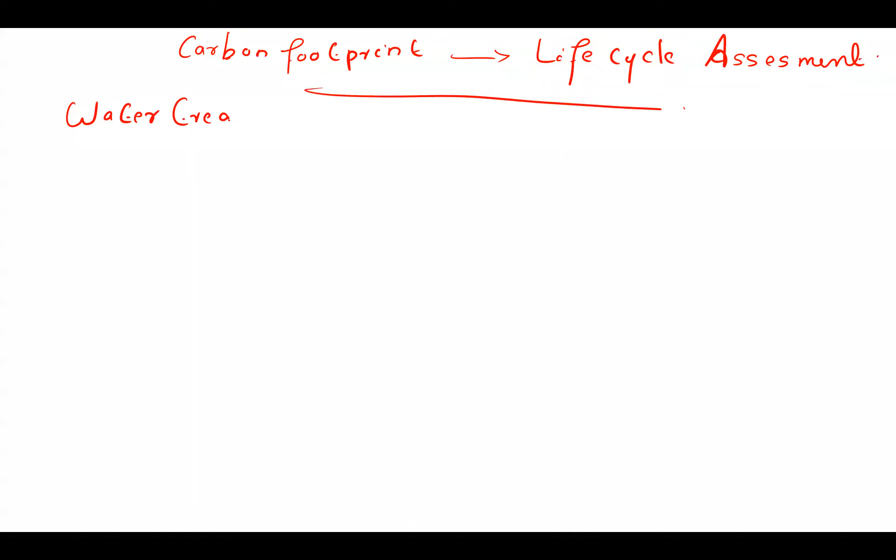So life cycle assessment, so even in terms of water treatment plants, different types of water treatment plants, okay, in life cycle assessments. So here I'm just giving a simple point, not that we have to discuss on water treatment plants, but I'm just giving you a hint that whether...

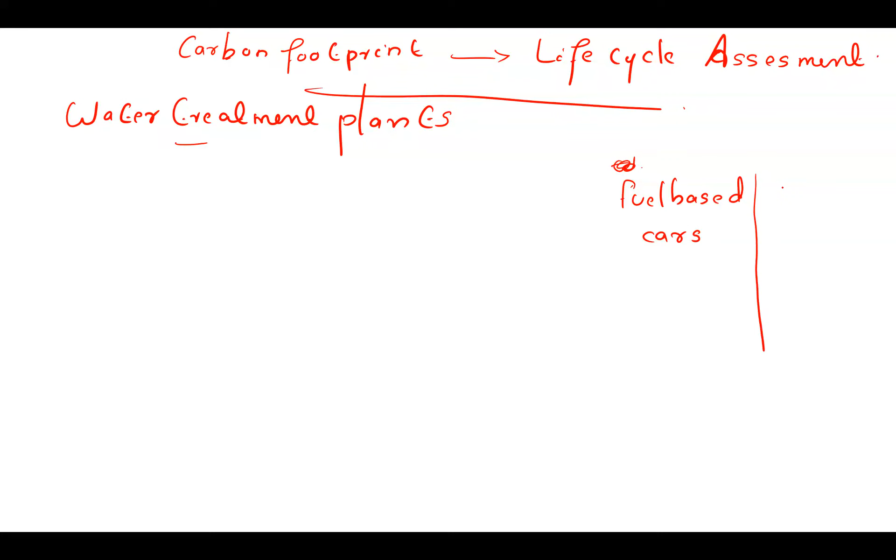Is okay, I just give the example of fuel based cars, then electrically active electric cars. What we normally say is carbon emission from electric cars is less, that we assume, right? We always say electric cars are good, and for fossil fuel based cars, we say there is a lot of pollution, mainly air pollution. But when we really go for life cycle assessment... have you guys heard about this life cycle assessment?

Sorry? Yeah, that will come, that is there. Also, when it starts to burn, each and every part of electric cars, its tires, its body parts, metallic parts and engine - even the engine, if you take each and every part in the engine, how do you produce that, how do you fabricate, how do you make that? Even when you fabricate that, how much pollution is happening? Pollution in each and every step, from each and every part of the car, from its starting point to the end of usage, till the end of the car's life - how much pollution is it causing. When we analyze this, that is the life cycle assessment of electric cars. You get to know that even electric cars also have a large amount of carbon footprint. That means it will emit carbon dioxide, carbon monoxide, sulfur dioxide also. When you analyze the whole cycle of electric cars, it is also not below that of fuel based cars.